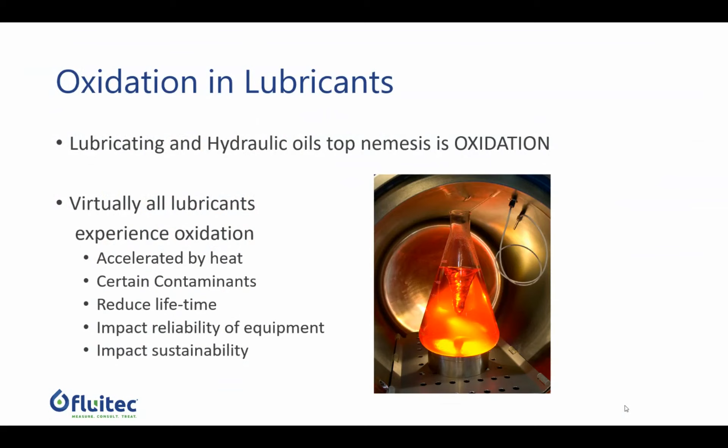When we have live seminars, unfortunately not today, we look forward to having live seminars back soon. Very often I receive the question, what is oxidation? And during those seminars, I usually take an apple in front of my desk, take a big bite into it, and then let it stay for half an hour, and you get the results. This is oxidation. So you're having a reaction with air or oxygen if you want.

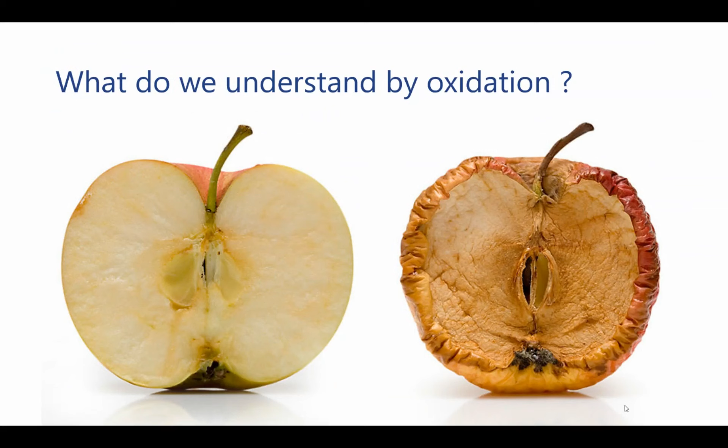Another good example of that is iron and rust as an oxidation between iron and oxygen. Or you can think about any tire, which is also going to harden and become oxidized. So oxidation is absolutely surrounding us. Another severe result of oxidation is this picture I like to share. Absolutely, you don't want to wait that long, but yes, oxidation can also result in increased cross-linking of your hydrocarbon chains and then create this high viscosity increase.

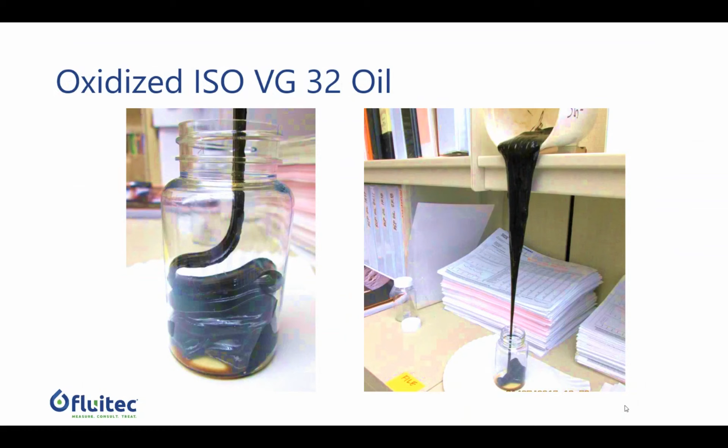It reminds me of my first maintenance director in my first job telling me that when we needed to follow up oils, just look, smell, and feel the oil. Times have changed absolutely. So again, with modern lubricants today, you will not see this viscosity increase, but just as a symbol for you. So let's talk about oil health care.

We know that for protecting the base oil of any type of lubricant in service, antioxidants are a critical additive. They are going to ensure that the lifetime of the lubricant is assured. And to make a comparison that we often make, antioxidants are just like this apple and the apple skin. What is inside of the apple has to be protected by the outside. And that's the same for your lubricant. So the base oil needs to be protected at any time by the antioxidants.

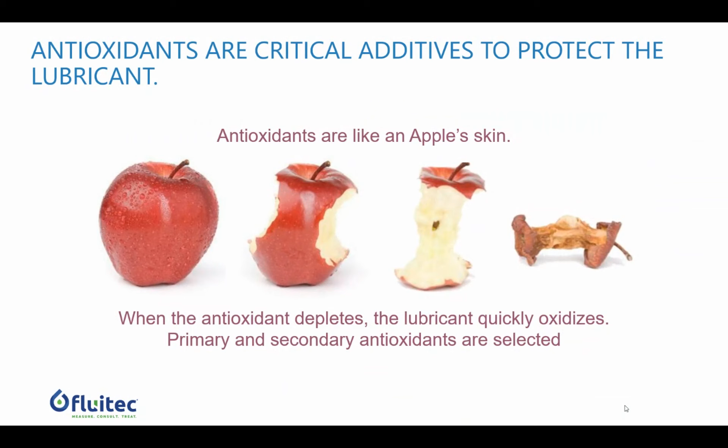There can be a mixture of antioxidants, different types of antioxidants working in synergy. And why do we use this picture? It's just to visualize what type of lubricant, in what state, you want to use. I have made my decision when I see a picture like that, and I'm sure you also do that. So the similarity to a human body is quickly made.

So it is a chain reaction which is propagating all the time, making also free peroxy radicals. And if you do not stop this reaction, you will continue to produce free oxidation radicals, and it is going to be up to the antioxidants to be responsible for stopping, or if you want, terminating this cycle of auto-oxidation.

And that means that antioxidants in a process of lubrication are sacrificial. They will be consumed. It is very normal that you will see this consumption of antioxidants. So monitoring at any time the oil health means monitoring also the antioxidants.

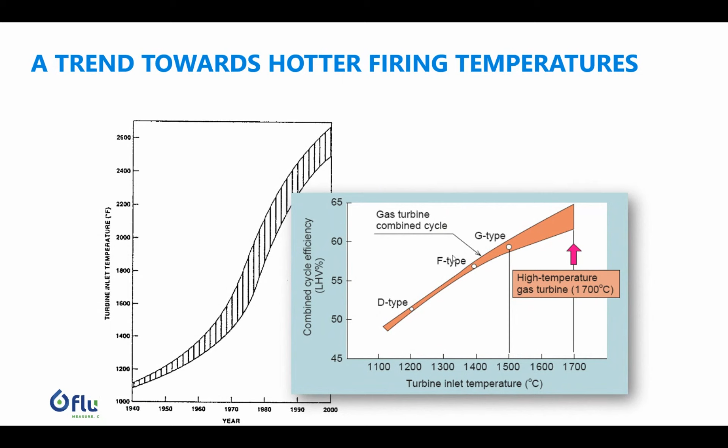You can see that typically that means that the bearings or the metal components lubricated will also see higher temperatures, knowing that the number one characteristic feature of a lubricant is to dissipate the heat or cool the metal surface. So you can conclude from that that lubricants today will absolutely be faced with higher temperatures.

If we then take a helicopter view on more than 100 years of oxidation tests, we could present it by this graph. So in the early years, acid number was developed as a test method to really look at the results of oxidation, I would say mild oxidation, most probably, looking at the working conditions, and was at that time a good test method until the mid 1900s, when there was more and more the use of steam turbines,

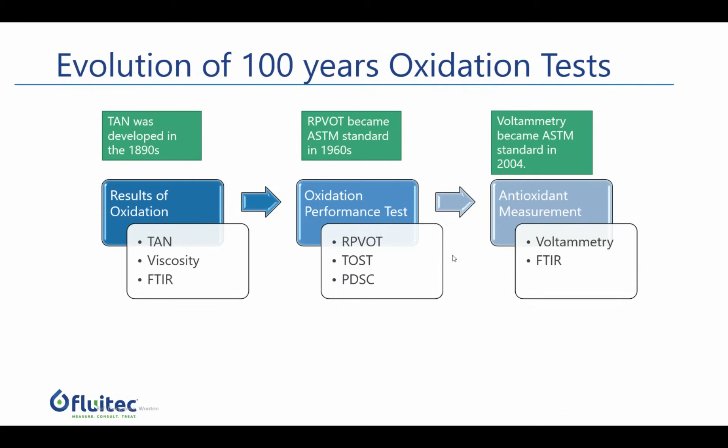requiring development of the oxidation performance test, the RBOT at that time, and now it's called RPVOT, as an oxidation test method. Until the early 2000s, with the appearance of new formulations, newer base oils, and also more use of gas turbines, there was a direct need for antioxidant measurement, which is then covered by linear sweep voltammetry, or if you want, also FTIR.

So linear sweep voltammetry, commercially known as the RULER, stands for a technology that is measuring directly the amount of individual antioxidants. Compared to FTIR, LSV will not be masked by, for example, an ester base oil. So RULER stands for, when you perform this technology, measuring at any time the remaining useful life of your lubricant, any type of lubricant that contains at least one type of antioxidant.

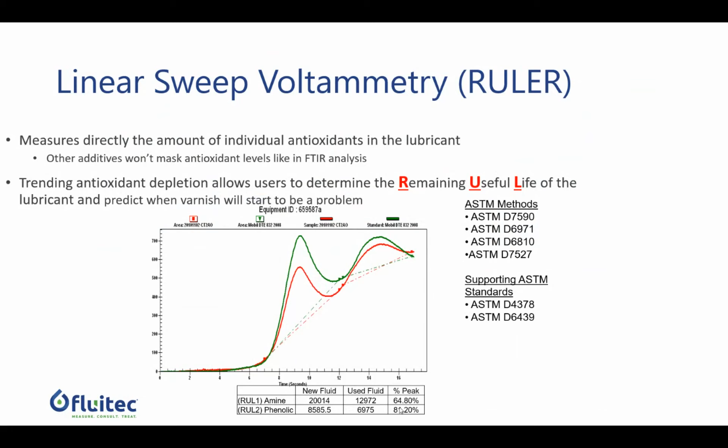Linear sweep voltammetry is an electrochemical test method. What does that mean? We are going to detect the remaining activity of the antioxidants by measuring the remaining activity of the functional group of the antioxidant. A long word. What does that mean? A functional group of the antioxidant is that group specifically that has the capacity to neutralize these free radicals. Once it has reacted, remember it's a sacrificial additive, this functional group cannot react anymore. And that is what LSV is electrochemically measuring.

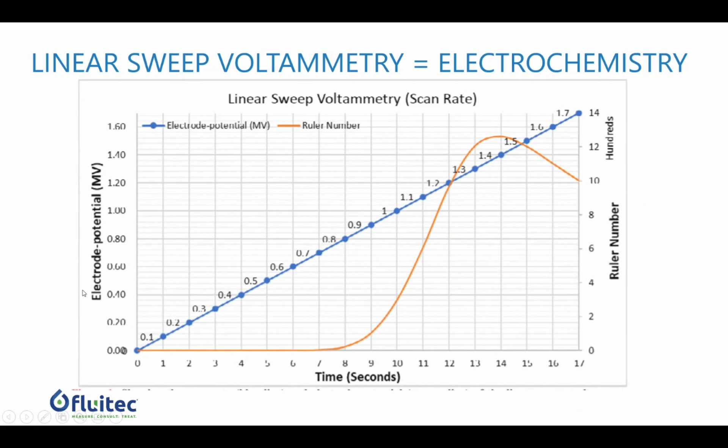And by applying a short test in 17 seconds, by applying a linear voltage increase, you can create an oxidation reaction. So the red line is the oxidation reaction wave peak, if you want. And what we achieve by this graph is that the time of the appearance of the antioxidant is telling us the type of antioxidant, because we are measuring the different functional group. Think about the zinc phosphate, or an amine, which is NH, or a phenol by its OH group. And the area, or the peak height, is related to the remaining activity of the specific antioxidant.

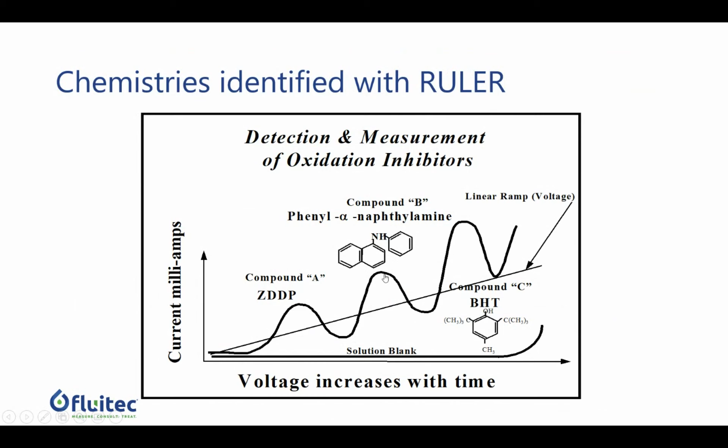LSV, for simplicity and also for ease of use, is able to detect a wide range of antioxidants that you can see in this column, a wide variety of antioxidants, depending on its application. To give an example, if you have an amine in a polyolester for jet engine oils, or if you have a ZDDP in an aminic mixture for combustion applications, you will be using different test solutions, because the electrolyte is going to be binding the specific antioxidant during the reaction of the electrochemistry.

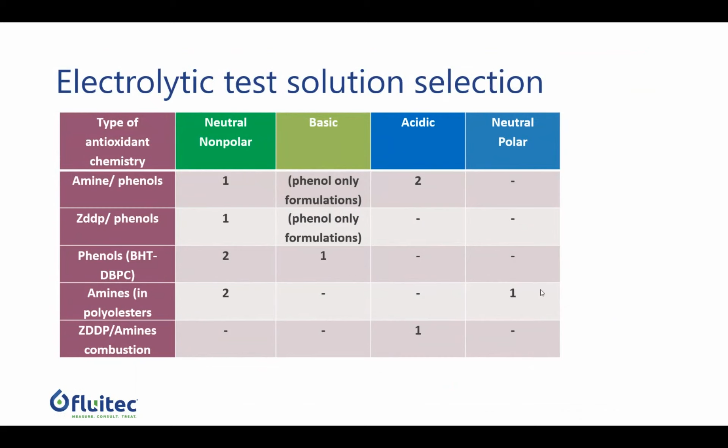Do we have any specific question on LSV, Filippo or Guillaume, before I continue with talking about MPC technology? Okay, good. Well, I will then continue to save time.

So now that we have spoken about LSV as a first approach to condition monitoring, why is MPC such a useful combination with LSV? We have to go back a good 15 years, 2004, 2005, with the appearance of optimized oil formulations with specifically group 2 and group 3 base oils into hydraulic fluids, R&O formulations, compressors, gear oils, which are resulting in an extended lifetime of the fluids because they have a higher oxidative protection. At the same time, we noticed that the way they degrade during oxidation or thermal degradation, the contamination buildup is very different to a group 1 oil.

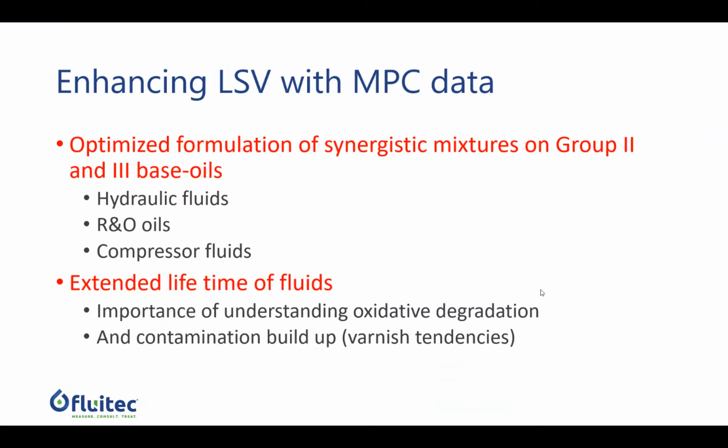This is referred to as, some of you will certainly know, the varnish tendency, which we came to understand in different research programs. For example, this research program was presented at the ASTM Symposium in 2005, where about 10 oil formulations were oxidized, and during these oxidation cycles, from 1 to 8 cycles, we see that there's a constant increase of the MPC value. I'll explain the MPC value in a few minutes, but see from this correlation that where ZDDP and aminic antioxidants have a similar depletion trend, not very high, in opposite to that, from the same type of lubricants, the phenolic antioxidants have a definite different depletion trend.

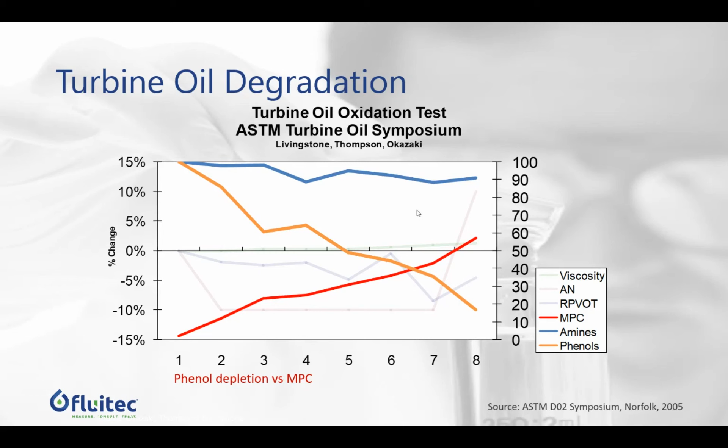And if you look well, you can see that the orange depletion is nearly opposite relative to the increase of the MPC. And that has to do 100% with the contamination buildup due to solubility issues with the newer oil formulations that need, of course, to be addressed. So by the mid 2000s, there was the MPC method, which stands for membrane patch colorimetry, covered by ASTM method D7843. Although it was initially developed for turbine oils, it is today a widely used test by commercial laboratories and research laboratories, helping to indicate the amount of oil degradation products, insoluble and soluble content, in a wide range of fluids.

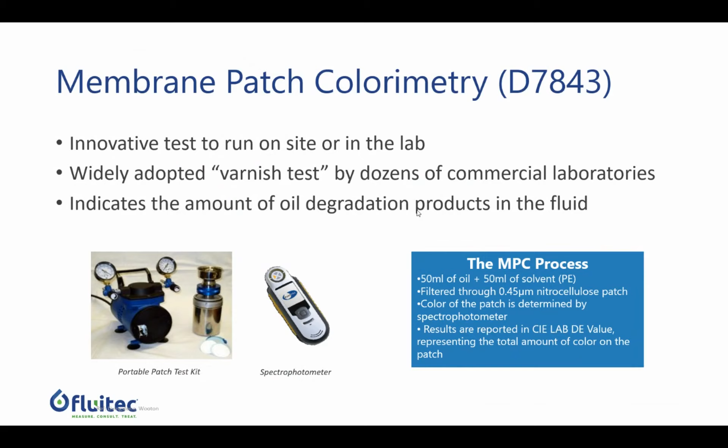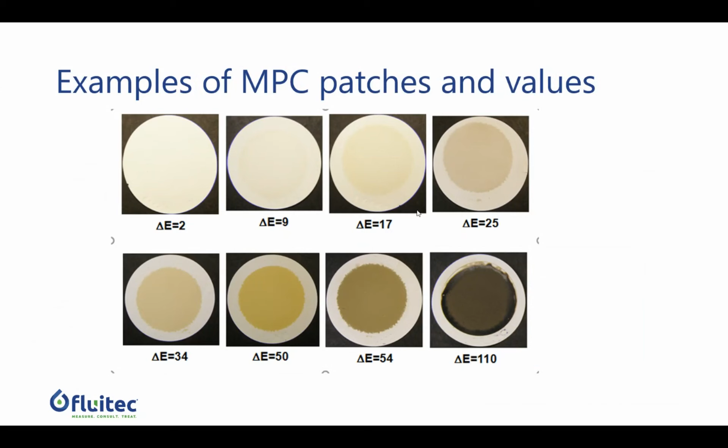The intensity tells us how much quantity you have. Also, what is good about the MPC method in correlation with LSV is that the color identification of the patch also tells us a lot of information on the possible root cause of degradation.

One of the possible root causes is accelerated depletion of antioxidants, which can be caused by excessive oxidation or thermal stress, creating some of these insoluble products.

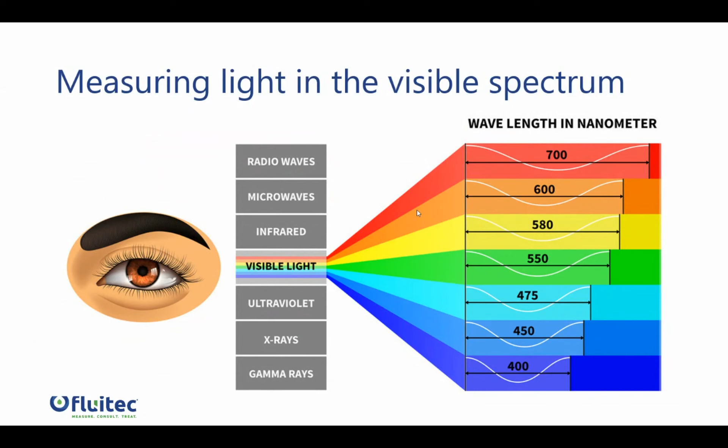One point I really wanted to mention, and I'd like to thank our partners from Ocean Team in Qatar for supplying us this information, is that very often we receive the question: my oil is very dark, it must be in bad shape. That's certainly not a good conclusion, it's not conclusive. The color is certainly not necessarily related to the varnish potential.

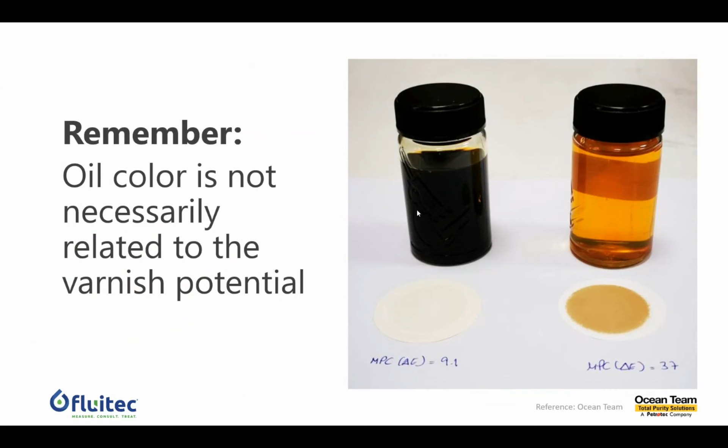Understanding, yes, you can hear me? Okay, sorry, I had a little problem with the mic before. Just first to inform that unfortunately a few people cannot hear the presentation, they can see it but cannot hear it. There are several of them already, and I think it's the platform that's creating some problem with some browsers.

Besides that, I have one question that was asked before, which I should have addressed then, but unfortunately I couldn't. It's about RPVOT and voltammetry, two different methods, and they want to know if these methods can complement each other to give better information about the oil condition.

I said yes, they are not the same methods, they give two different pieces of information, but maybe you can explain better. I think they can be complementary.

What we see is that RPVOT can be a test method for development of new oil formulations, whereas in-service testing is more applied by LSV because of time and accuracy, and also individual antioxidant monitoring, which you cannot achieve with RPVOT. It's very valuable for root cause analysis and degradation pattern identification, which I'll cover later.

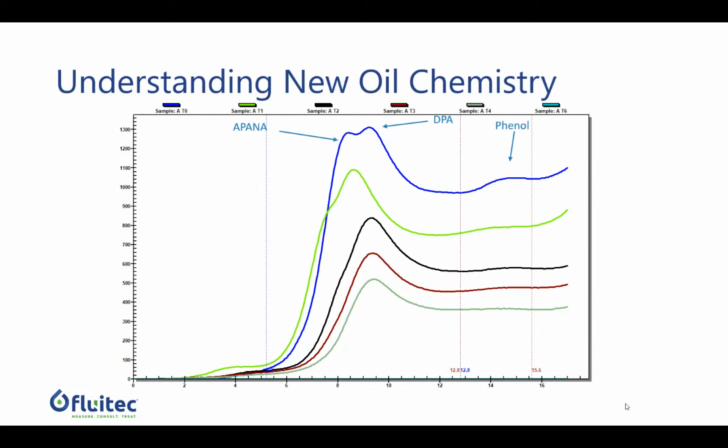So, correlation between LSV and MPC. This is a good example of a turbine oil stressed out for several weeks, with a mixture of aromatic amines, alkylated PANA with diphenylamines and phenolics. You can see that when stressing the fluid over several weeks, the major antioxidants deplete first, followed by the second antioxidants.

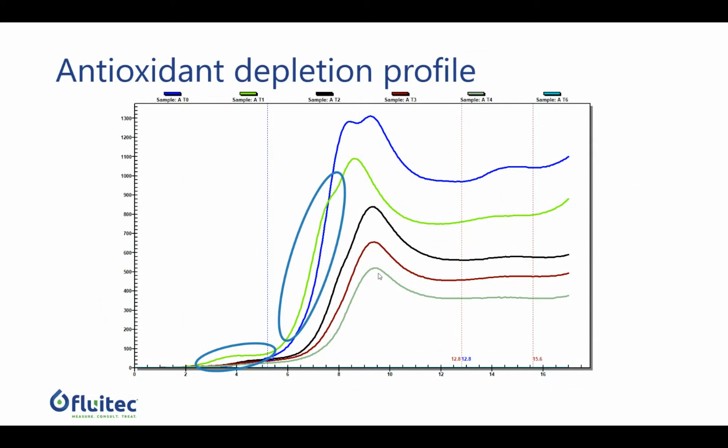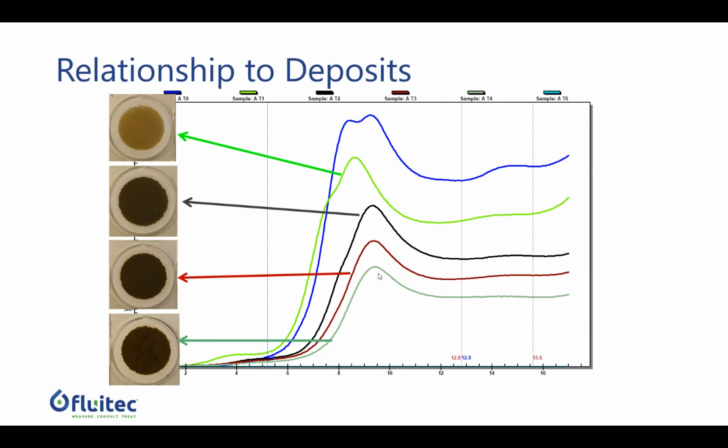What does that mean from this perspective? It doesn't tell you very much, but if you correlate the depletion of these main antioxidants, you can see it translates into the behavior of the oil with respect to the MPC. We can see that sample 2, which is after one of the major additives has been depleted, shows a significant increase in the MPC value right at that moment.

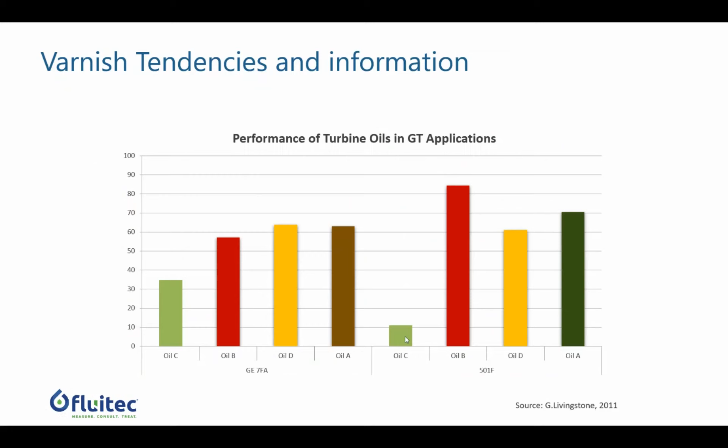Another good value of LSV and MPC in combination is understanding how turbine oils will have a different degradation tendency of varnish formation in function of its formulation, but also in function of the turbine, its application. We see here, for example, two different turbine suppliers with totally different varnish tendency for the same oil formulation.

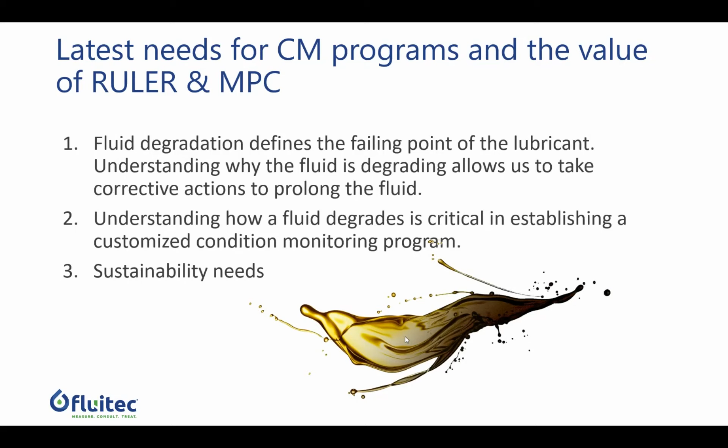Last but not least, today with sustainability requirements, it's important to really understand in more detail how fluids are degrading. And why do you want to know that? Because I love to use this graph from my friend Rudiger Krethe at Oelcheck, where he divides the graph of lube oil into three phases, and the induction phase is where you want to stay and monitor the oil, avoiding the build-up of free radicals, acidity, and sludge.

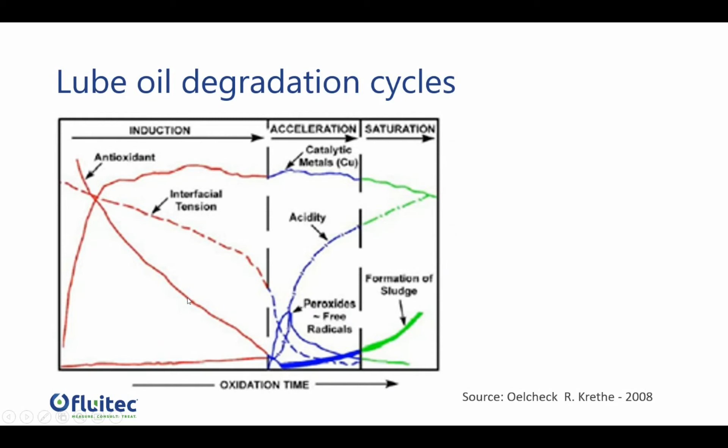So in essence, if you can stay in this area, you're able to control your base oil and your fluid, and much more safely extend the fluid life.

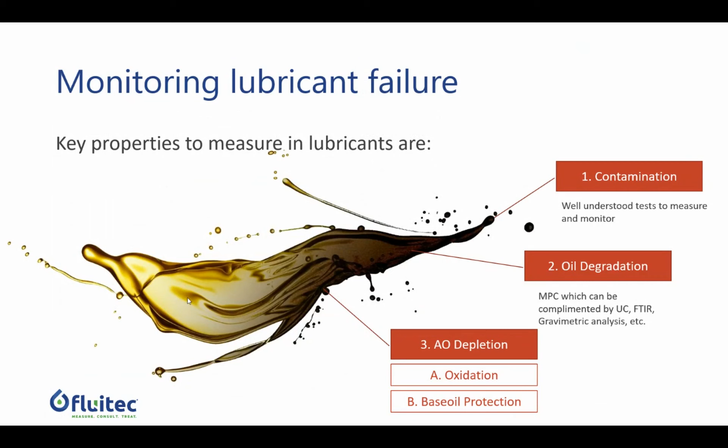That means that beside contamination control, like particle contamination and wear analysis, oil degradation is important to understand from a contamination perspective, like MPC, ultracentrifuge, FTIR, but also to be in a position to relate that to what stage of the oil life cycle you are in, how much of these antioxidants have depleted.

What we understand by compatibility is not just understanding what is going on with used oil, but are you cross-contaminating a new oil with existing contamination from an earlier batch of oil? Or, for example, are you mixing oils which are not 100% compatible? That will have its impact immediately on air release, foaming, and emulsibility.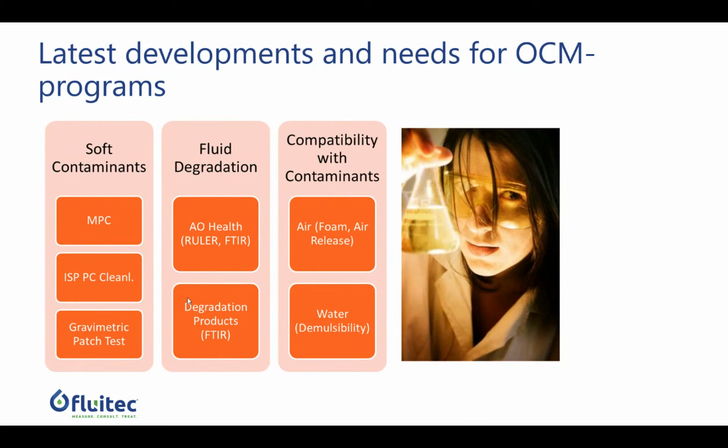So this is an example of a very performant matrix where, again, LSV and MPC play a major role.

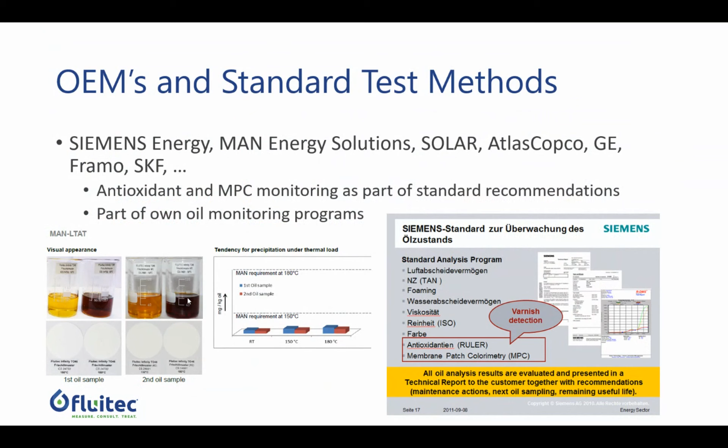If we look at OEM and standard test methods, how have OEMs today reacted after looking at the last 10, 15 years and the standard test bodies, we can see there's a clear evolution from major OEMs like Siemens Energy, MAN Energy Solutions, Solar, Atlas Copco, where LSV, antioxidant monitoring, and MPC are part of the standard recommendations or even their own oil monitoring programs, in order to better support their customers and increase the reliability of their equipment in the field.

And we can also see that today standard test bodies like ASTM and VGB are looking at including these test methods as part of the right guidelines for end users of these in-service fluids.

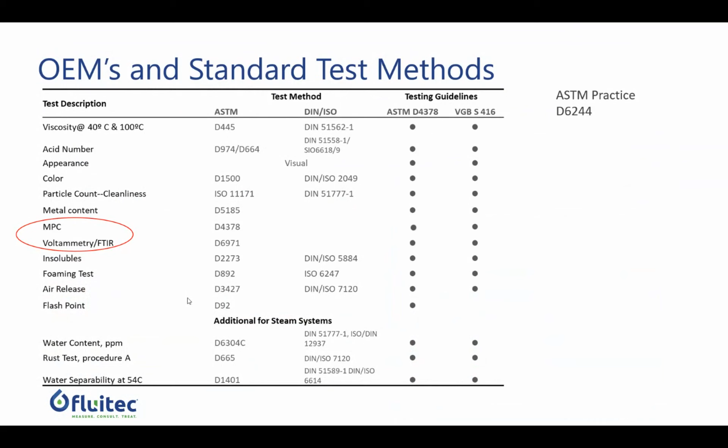I've added another interesting practice from ASTM, D6244, which is more used for auxiliary equipment like gears, hydraulics, phosphate ester systems, all of them really highlighting the guidelines, condemning limits, and action items for this. So we have a good 10 minutes left to talk about some of the case studies, and then we'll open up for questions.

When we prepared this webinar, I tried to bring as many case studies as possible. Unfortunately, time is limited, but just to give you a view on where today direct AO, LSV, and MPC testing can be applied, it's going from turbine, compressor, hydraulics, over greases, gear oils.

I've not included today case studies on greases, nor on transformer oils, transmission fluids, or wind gear turbine oils. But I see, for example, this afternoon there is a session from MRG in the US specifically talking about grease analysis, including LSV.

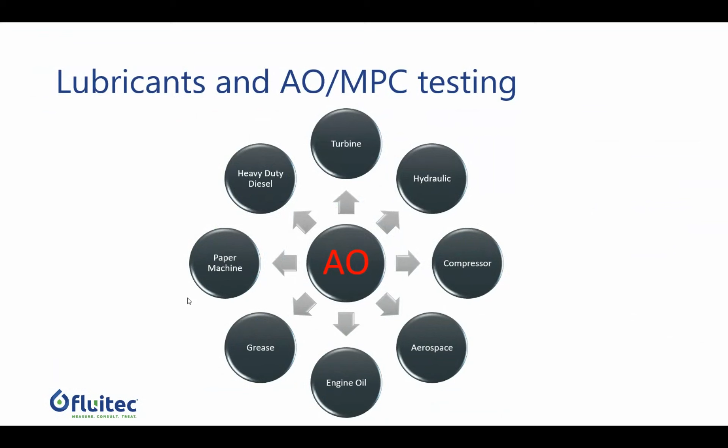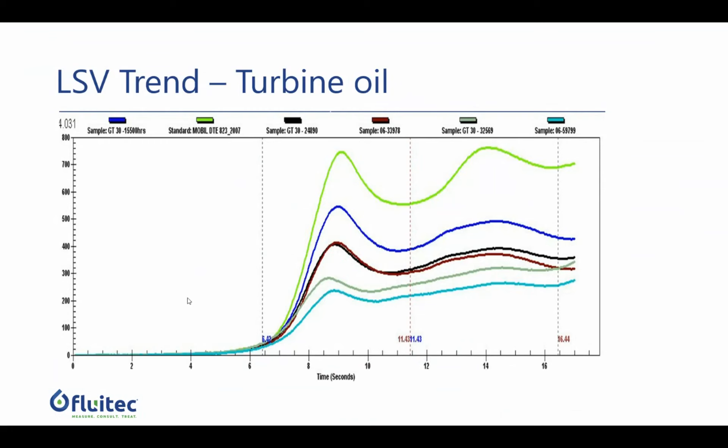So let's focus on some of the application. The most obvious one that most of you who are attending this webinar will know is turbine oil, where you are trending antioxidants like individual amines and phenols.

What I really want to emphasize with techniques like LSV and MPC, if they are part of your oil monitoring programs, is that you need to follow up by trend analysis. It has no sense to look at one data point and only measure one set of data. In this graph, for example, you can see very well how you are trending and correlating the most important parameters and showing different operating conditions. That is the real value of these techniques as part of condition monitoring programs and trending.

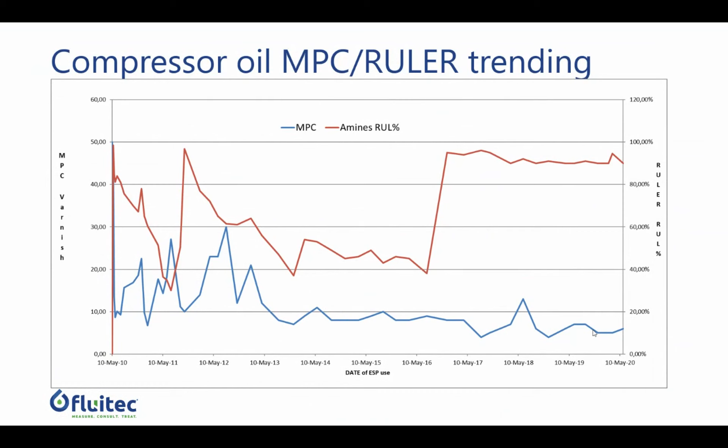Another case is the compressor oil, where you see the blue line is the MPC value going initially from 50s to a level less than 10. You see here on the Y scale, the secondary scale is showing you the antioxidants level, and we can see that at this point when the level of 40% is achieved, you still have a lot of margin, because usually 25% is the condemning limit. Still here, the oil was re-additized, and you can see that the lifetime is then again controlled in combination with the control of MPC. So here, a good example of LSV and MPC.

An emerging market today for LSV and MPC oil analysis is hydraulic oils. Think about markets like marine, injection molding, mining, steel. With the new use of base oils and additive technologies, lower oil volumes and higher operating temperatures that we see, issues like on this servo valve, as well as pump failures.

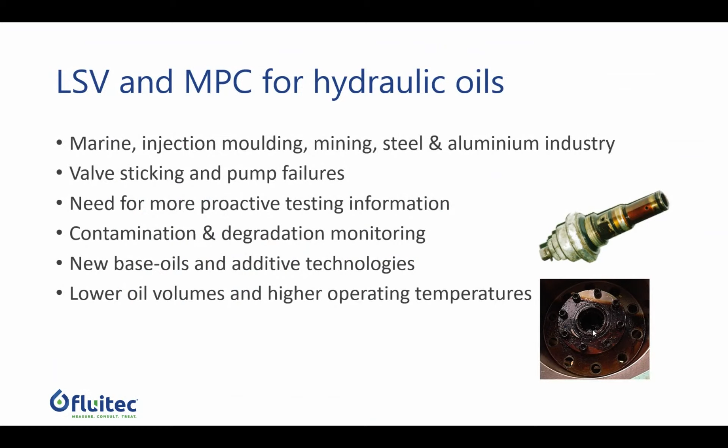Where does it come from? It's also a lot of oxidative stress happening on the fluids, resulting in deposits on the valve components, as you can see here on these two pictures.

Knowing that with LSV you have an ability to look at a wide range of additives, even the antioxidant property of a zinc dithiophosphate, known from engine oils, but also used as an anti-wear antioxidant for hydraulics.

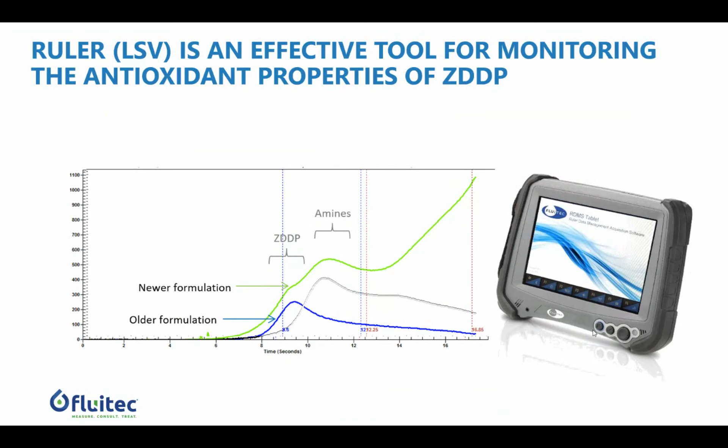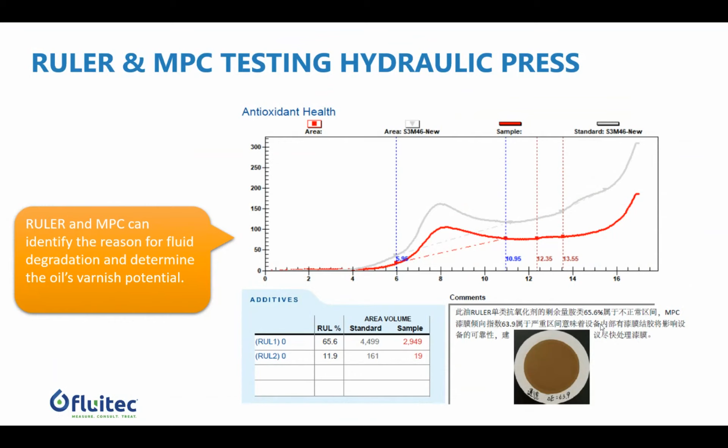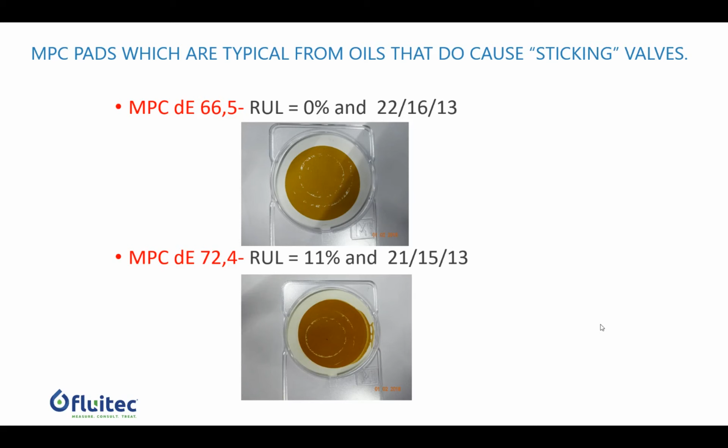Another case study here: ruler number really low, 0%, high MPC value. Of course, in these fluids you're far beyond the useful life of the fluid. And wouldn't it be ideal to pick up this information before you're getting to this level of oxidation?

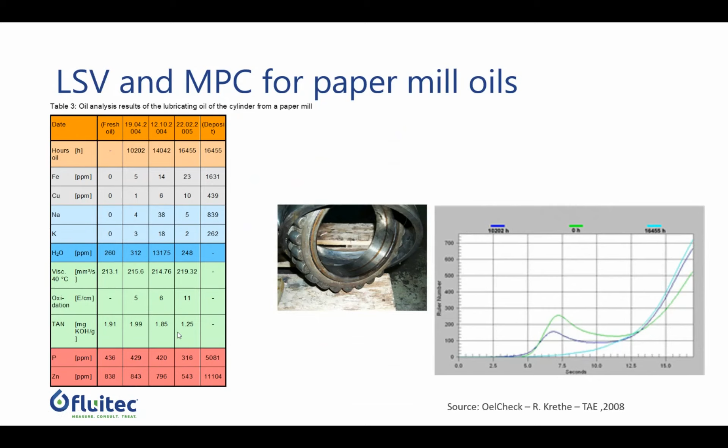A good example I have received also from OelCheck from a presentation we did together. I remember it's on a paper mill, paper machine oil from a cylinder, lubricating a cylinder, suffering from a high water increase. You can see it here, the water increase resulting shortly after that with iron, copper increase, washing out the sodium. And if you then look at these samples, how the ruler graphs are looking, we can see that, in fact, the last sample here was having 0%. So a very sudden drop of antioxidants just because of oxidation, and clearly before even the acid number is further increasing. So it would be wise here to take action before you continue to run in these conditions.

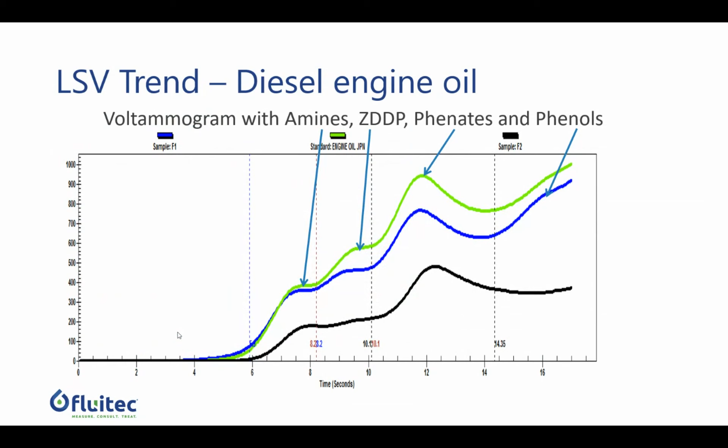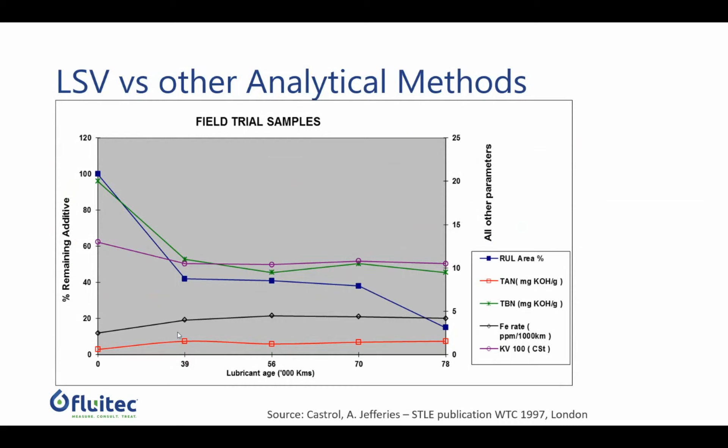Trending very well also on this field trial, up to 78,000 kilometers, this engine oil was showing a very steady depletion of antioxidants and stable TBN value, and no iron increase, showing that there was still good oil left in lifetime in the oil.

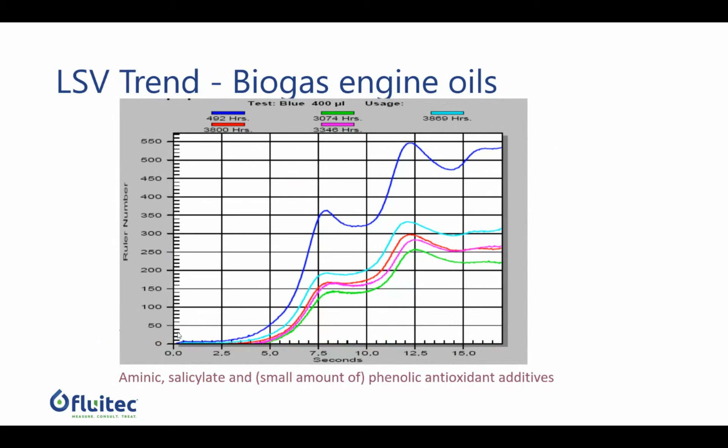As a combustion application, biogas engines are also an emerging market here in Europe. In biogas engines, because of the inherent combustion reaction and higher combustion temperatures, they are using quite a high concentration of antioxidants. We see here a good trending graph of antioxidant depletion on biogas engines.

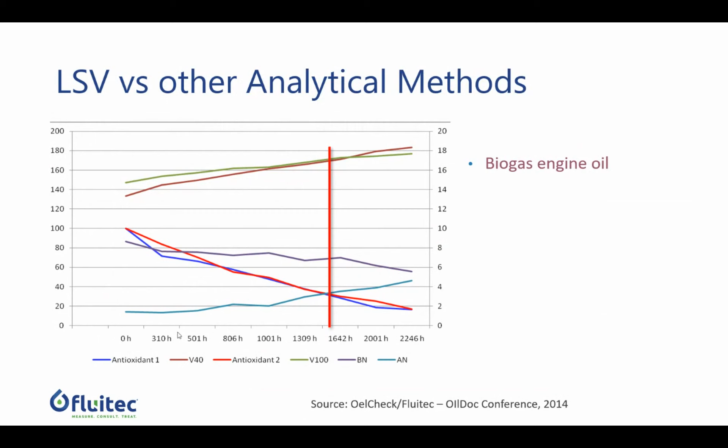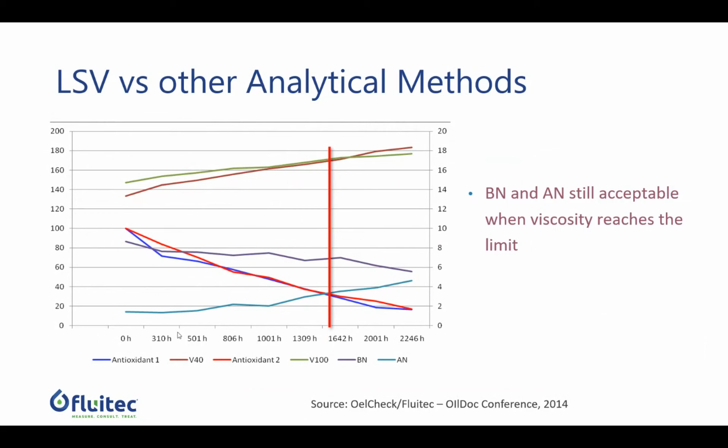Interesting in this case, and I would like to thank again OelCheck for supplying me this data, is the trend with viscosity and base number and acid number, where viscosity is starting to reach its limits. Base number and acid number are still acceptable. We can see that the depletion of antioxidants shows a much better correlation towards identifying the lifetime of the fluid. As you can see here, the fluid was changed at 2,200, and the real lifetime should have been around 1,700, which is for a biogas engine quite important, avoiding producing deposits.

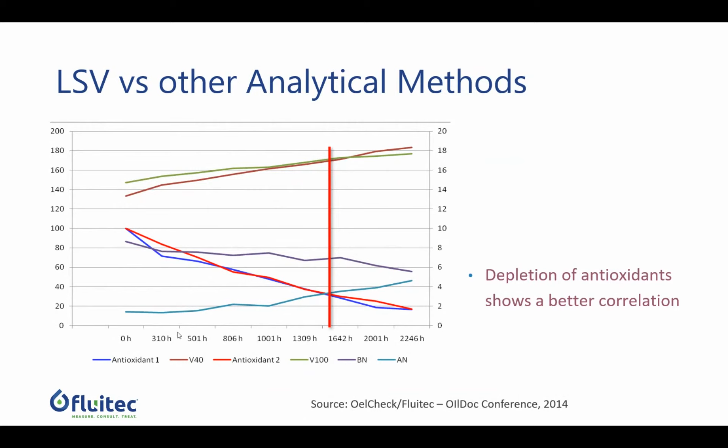Talking about synthetic fluids now, briefly, we can think about polyolesters in jet engine oils, gas turbines, industrial gas turbines, in this case roller bearing protection on a helicopter, suffering from coke deposit formation. When we looked at MPC, not only do we see a very high MPC, far above the limit, but also production of varnish agglomerates in these esters, although they have a very high solubility.

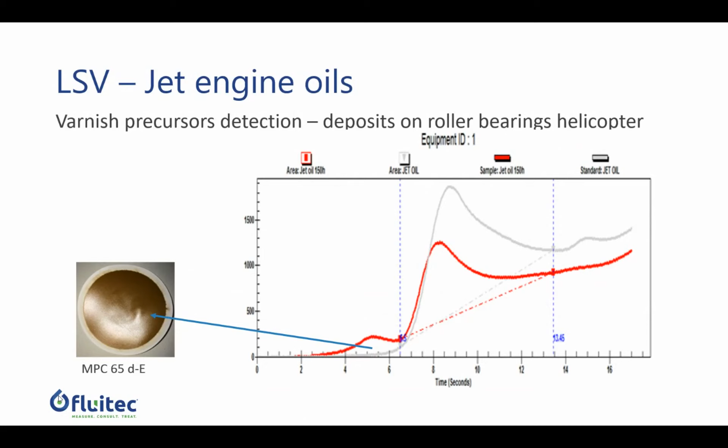And when we think about synthetics, we specifically think about ester-based fire-resistant hydraulic fluids, like we see in this steel plant, where valves were also suffering from deposits confirmed by a very high MPC level, and still, I would say, around 50% life of antioxidants.

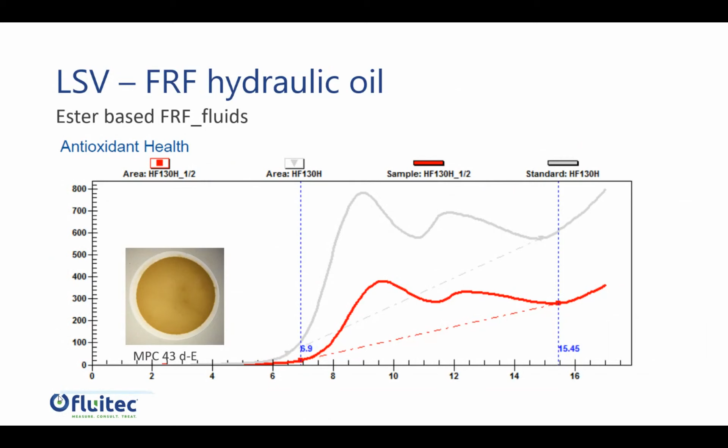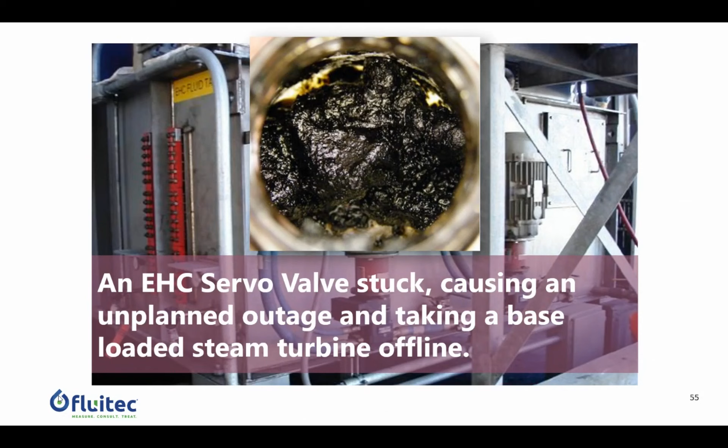And last but not least, I believe the market where today we see more and more need of MPC and LSV as part of condition monitoring programs is electrohydraulic control fluids for servo valves, where LSV can be used in a reverse way: you're not depleting antioxidants, but picking up phenolic production because of hydrolysis. Phosphate esters react with water, they hydrolyze, and they make these free phenols.

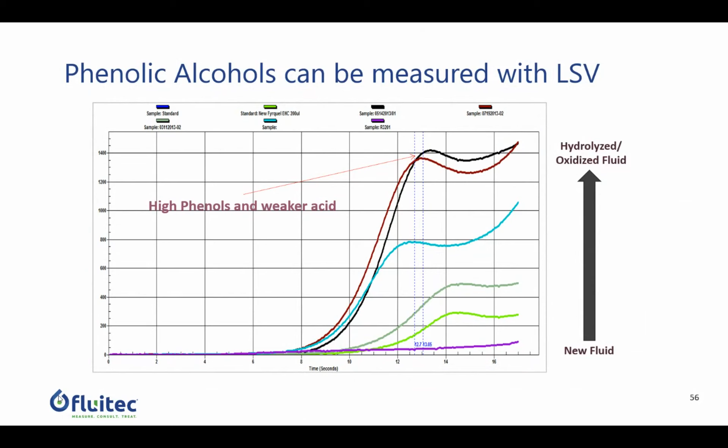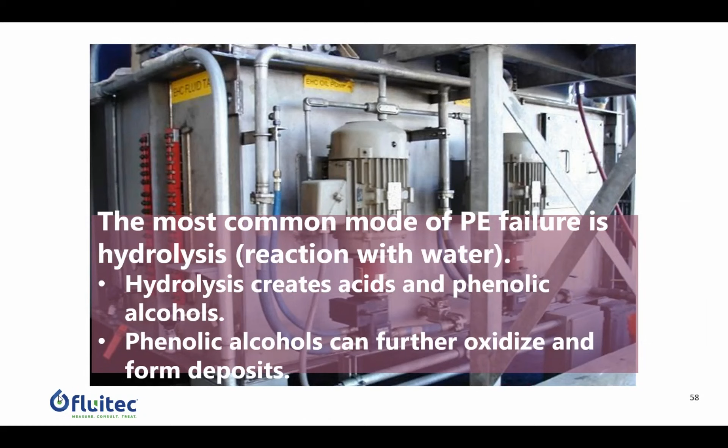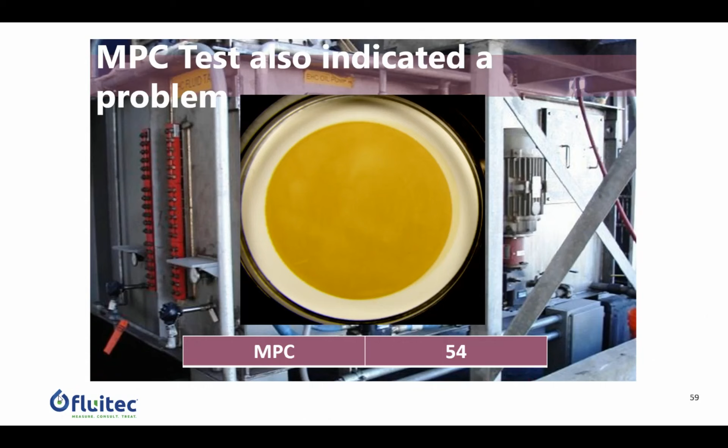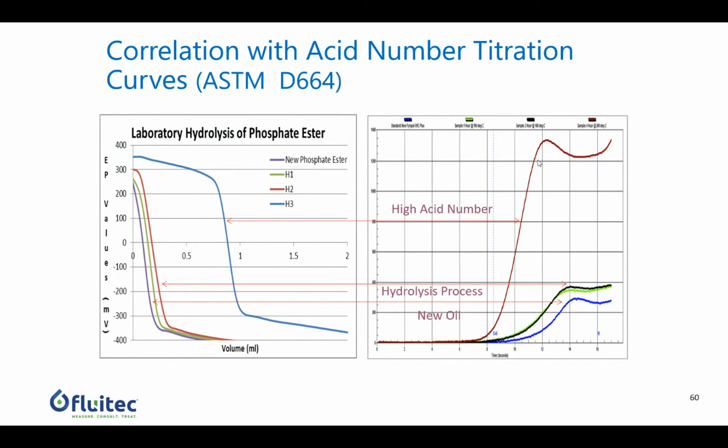What we have noticed is that although the fluid appears to be in good condition, the hydrolysis is creating a lot of phenolic alcohols, which can then further oxidize and form these deposits affecting the valves. This test had an MPC of 54 with, as you can see on the right graph, the Ruler number coming up extremely high from the new oil, versus the higher acid number, helping us understand that this oil should have been treated to avoid the buildup of acidity.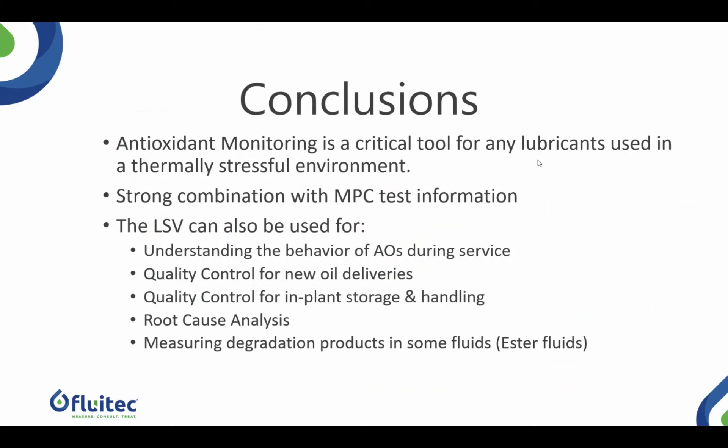We are 45 minutes in, so I'm on my last slide. I hope that from this webinar you will have learned that there is good potential in monitoring antioxidants for a wide range of lubricants, as long as they contain one type of antioxidant, in both thermally and oxidatively stressful working conditions. LSV and MPC are, I would say, partners. They give you very good information in combination. And remember that LSV is today also a very strong tool for quality control of your in-plant storage fluids and root cause analysis.